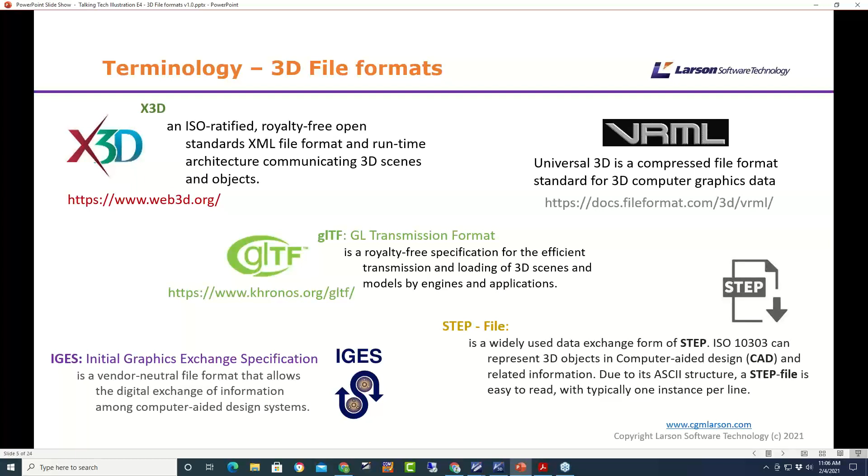As an overview, these can really be categorized at the top level as open and native formats for 3D. When I say open, I mean they're not owned and are non-proprietary—usually governed by a non-profit organization, so they're easily available, reliable, and you can standardize on them because they're open. They should be interoperable between systems. Then we have native formats that are owned and proprietary, which usually don't interchange between different CAD systems, although in some cases the software company does publish those native formats, usually at a cost, so they can be supported in data exchange software.

We usually categorize 3D files into two camps: data exchange and publishing formats. The open formats for data exchange, STEP and IGES, are very good for data exchange tasks and readily available from all major CAD systems.

So we'd probably advise that if you bring in data out of a CAD system, if it's not possible to use native, then STEP definitely would be the one we would choose. It's the richest format and very reliable and robust.

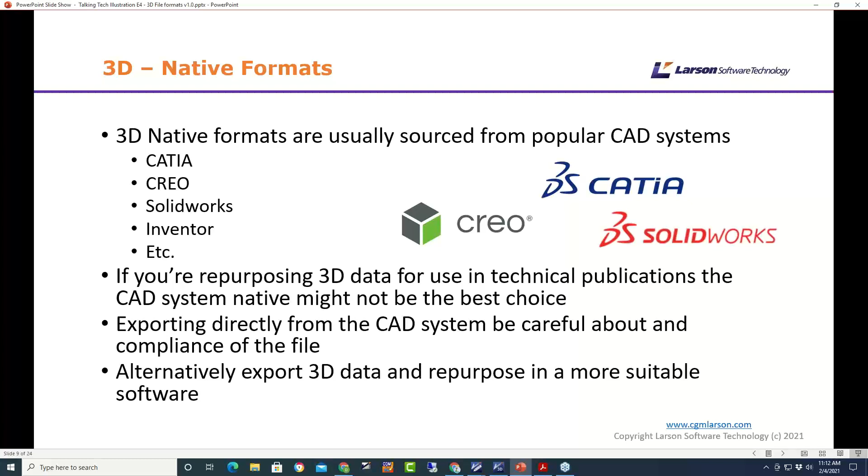So in the publishing world, if you wanted to publish these 3D files out to go into a web browser, there's a multitude of formats to choose from. There are some proprietary ones—I'm not going to mention them specifically by name—but there's certainly a lot more open formats.

So some considerations when selecting a 3D format: it's certainly important to be easy to implement in viewing the model, preferably in a web browser. The file size is also important because the bigger the file size, the longer it would take to render that on the screen.

Also in the technical publications arena, it's important that you can add metadata—interactivity and hotspots, and probably the ability to link those hotspots to external text—and the support of how you display that text. Something called placarding is where the text remains flat and doesn't rotate with the model, which could be important for legibility and instructions. If I haven't explained that very well, we'll probably have an example later in the demo.

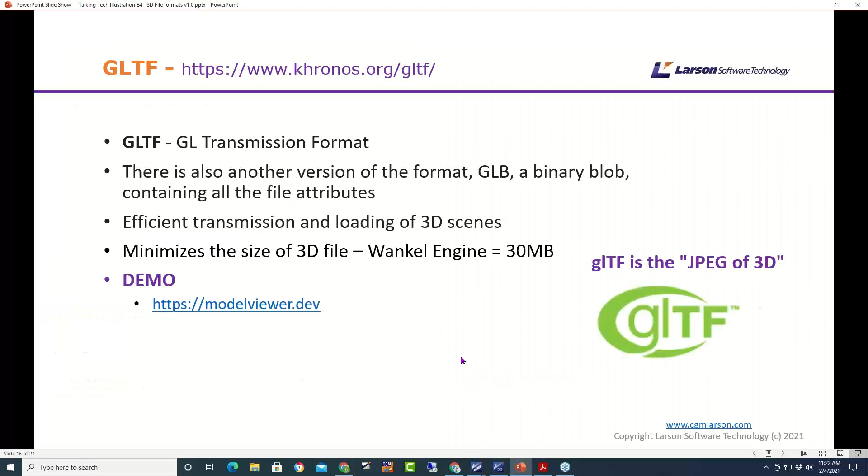And the other one I was talking about is 3D PDF. Again, it's open - obviously PDF became an open format a few years ago now. But this 3D PDF is really a standard PDF file with 3D content enabled in it. So it's governed by the 3D PDF consortium.

Inside the PDF, you would find the 3D file embedded, and it would either be a U3D or a PRC file. Probably PRC is more popular; it was developed by Adobe. The nice thing is it can be stored within the PDF, but also extracted for future use, which is quite interesting. If you need to archive a file, you can bring it back out again and reuse it in the future if needed.

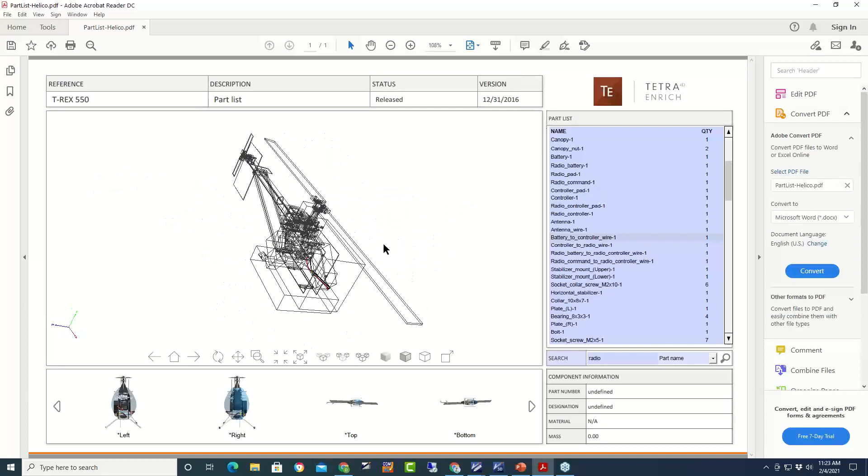So before we do the poll, I'm just going to show this example I pulled down, so we can maneuver the model in space. This is just a PDF, using Adobe Reader. The interactivity works. Just a caveat on this is that it doesn't happen just on the fly - you have to author this in some way using some software.

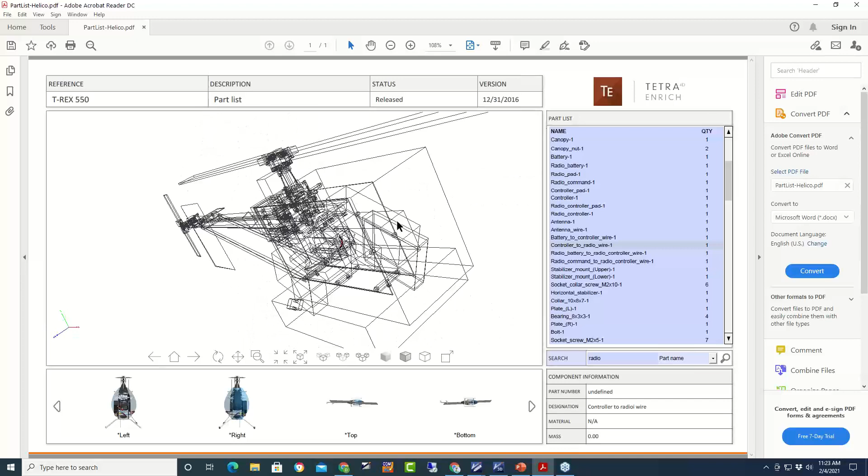So we can zoom in on the model, and it kind of goes to wireframe when you're maneuvering it, just to speed the rendering up. My only caveat about this is it's just one PDF file, so if you had a manual, you'd have to stitch all these together, and I forget the file size, but I think it's around 8 megabytes or so.

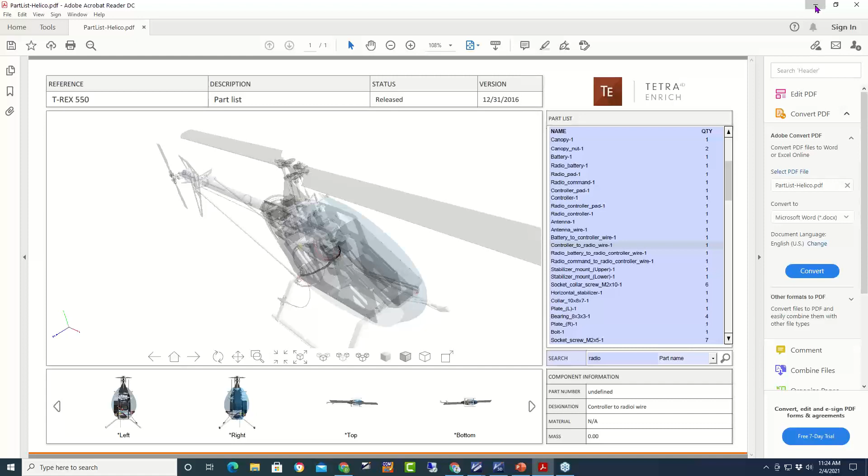Let me just double check it, and we'll come back to that. Sorry about that. Can't get to my desktop. Okay, that refuses to go to my desktop. Let's hold on.

Okay, so let's just look at the properties of that. So it's about 7.5 meg. You begin to see that if you have a multitude of these, stitching them together is going to result in a very large publication. So I can see it being used, but perhaps more for service bulletins or something like that - I think pulling a whole manual together in PDF would be a challenge with all those 3D files.

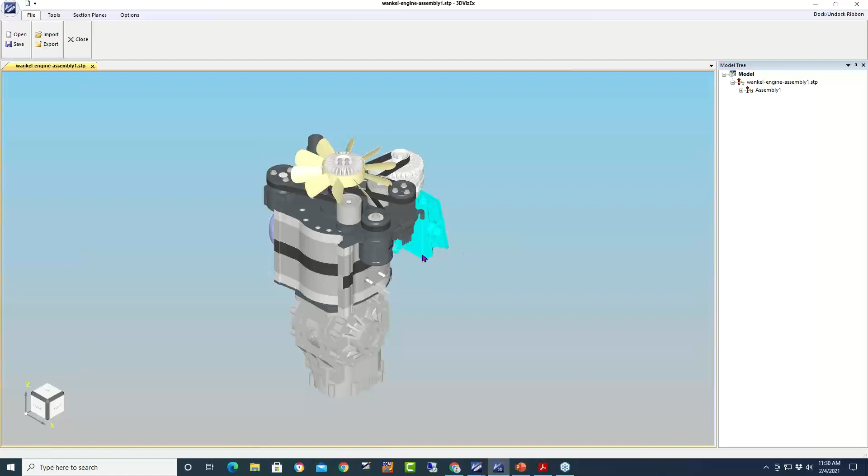But once we've got it in the software, and usually any software for that matter, once it's loaded into memory, it becomes a lot easier to handle. We can zoom in very quickly and so forth. Just be aware that we're obviously on the webinar, so you will probably have some lag on here.

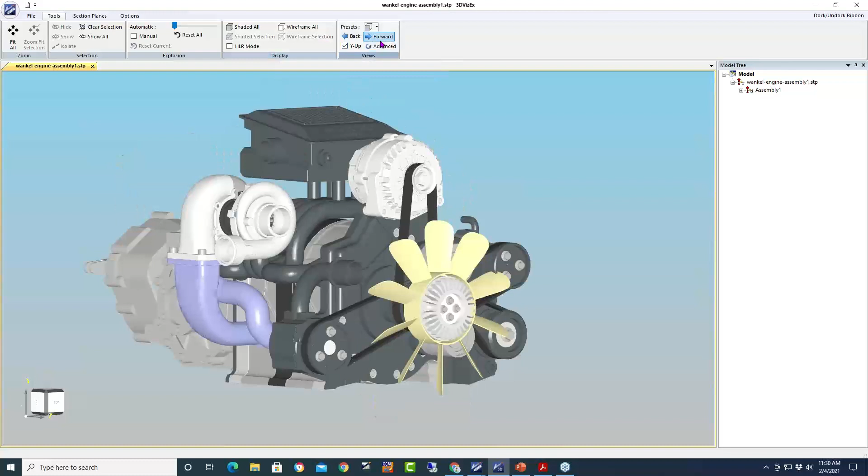So what I would usually do is actually maneuver this to, in this case, the isometric view that I'm looking for. And then I might want to begin to explode this file away, or some of the parts away on the file, to begin work on it.

So this is where our new format comes in. This is where I could save the file as a .vx3d file. And we'll just replace that one. So that will now be in that state. So it now becomes a VX3D file.

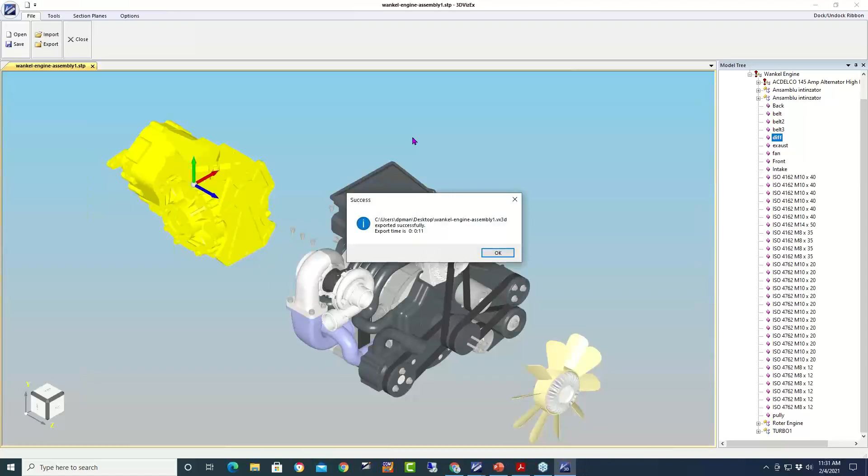Okay, it just says it did it in 11 seconds. Okay, so I've saved that to the desktop. I again can reopen that, and it's a lot quicker to open than in the original step file. But let's see if we can open it up.

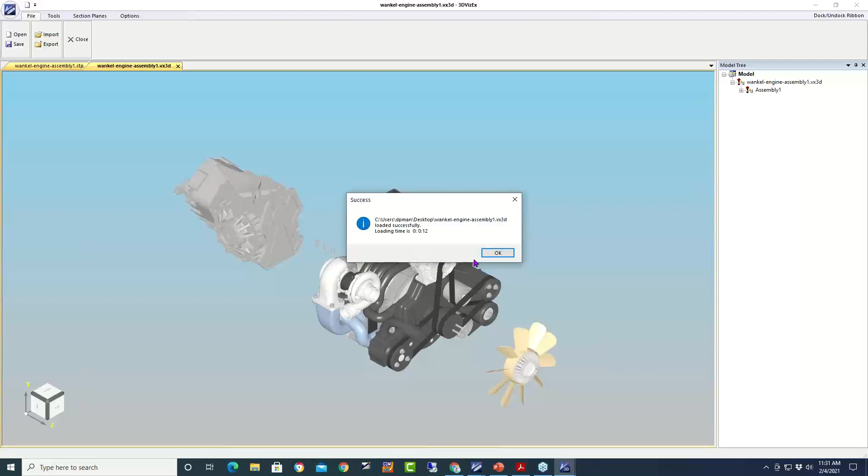So it should be on the desktop. It always seems longer when you're actually doing a demo and waiting, but I think it takes about 9 seconds or something to open it. Whereas this is obviously on my machine as well. It's actually 12 seconds. But you can see it's reopened it in that state that it was in before.

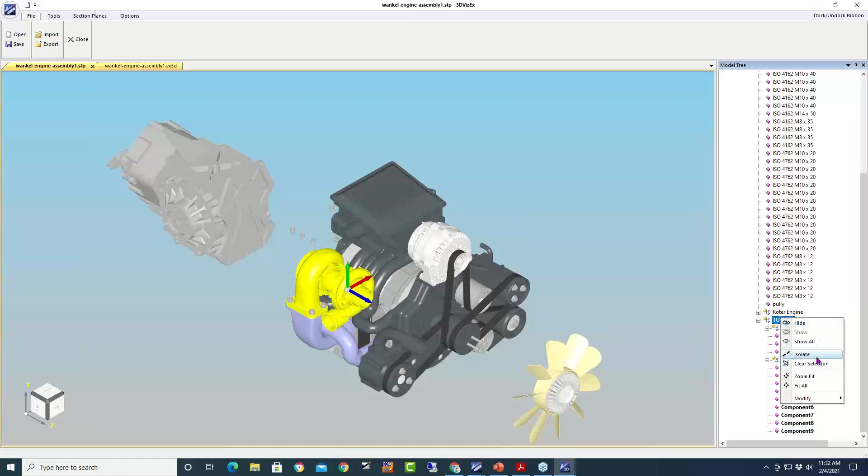Okay, so then I can still work with this file. So let's go to turbo here, and I'm going to just isolate this. And I can then work with just part of the assembly, begin to explode this off as well. So, and I could save it again in this particular state.

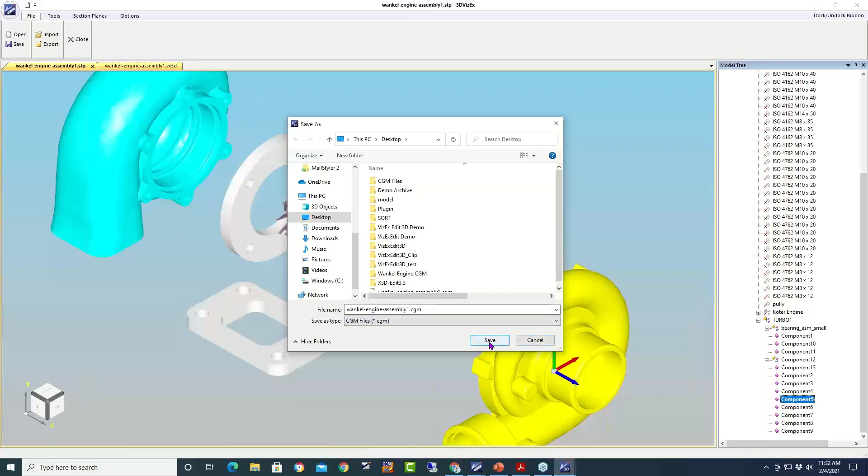And this is where we had the difficulty, is actually now, if I want to save this as a CGM, a 2D file, then a lot of the formats that we were trying to use as a native format didn't support the ability to do that. So I'm just going to save this as a CGM.

Okay, some of the settings are at the top. I don't want to dwell on that too much today. But certainly with the step file, the best quality we get converting to 2D is with that particular format, or it could be IGES for that matter. So we see a more traditional type illustration from that 3D file.

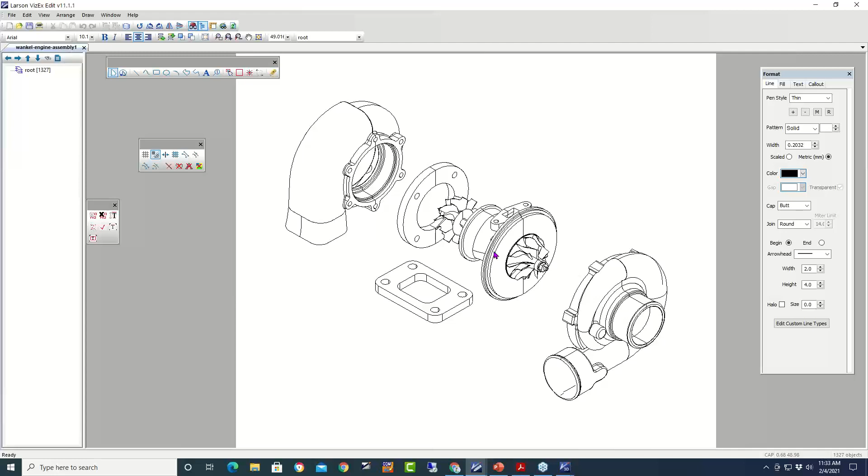Okay, let's just go back to our original.

So from here, I mentioned those other 3D formats. If we go to File again and Export, one of the options we have is going to X3D. The thing I like about X3D is there's something called X3D DOM, which means you can actually put this straight into a HTML file, so it embeds the 3D file into it. And if we just go to that option...

We've got some settings we can put up here. I'm not going to go into those in too much detail, but one of the options is to actually export the model tree itself with the 3D model. So let's just try that, and it should open it up straight away into the web browser when it's done. Again, it just takes a couple of seconds, and then it opens up in the web browser.

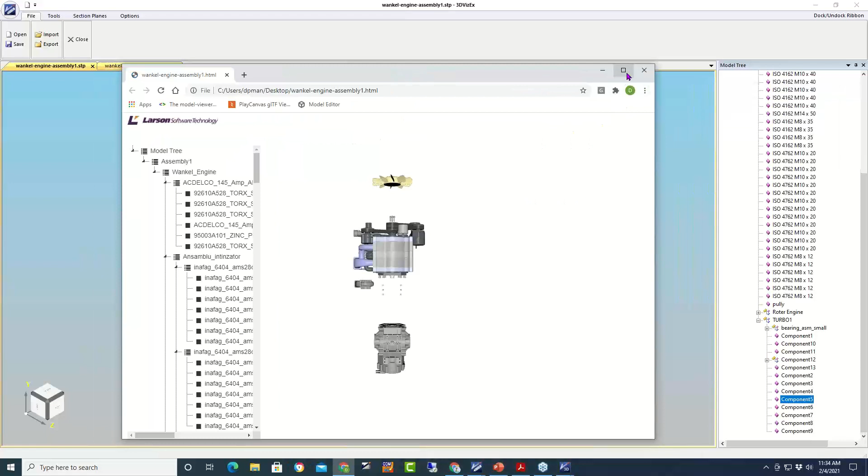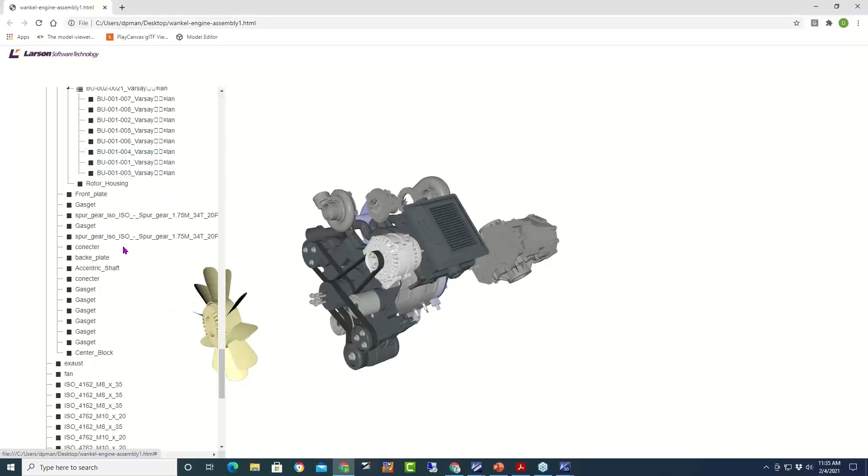Okay, so obviously we exploded the model. We can zoom in on it, and we get the model tree on this side here. Now this does interact with the model. Let me just see if I can find the spring, the fan. You can see that it highlighted the fan there.

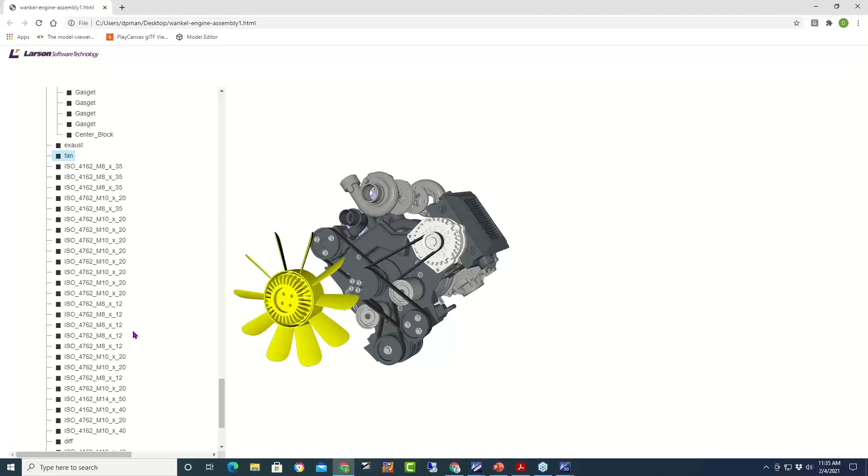So I think this could become useful for, obviously, the spare parts world where you want to identify parts and so forth. We're still perfecting this export. You can see there's a lot of extraneous data in the model tree, but in the next iteration of the software we'll be able to change names on that model tree and edit them out or in as needed, so that's going to be more interesting and more useful.

But as I said, this is the X3D format, and you can see that this is just in Chrome in the web browser. We're straight into Chrome viewing this, and the way that you can zoom in, it's pretty quick how it handles the model. So that's definitely a viable format for putting stuff on the internet, I would say, from a 3D point of view.

So let's just go back. One of the other formats we mentioned was GLTF. I'm just going to do the same model, I think. Export this out. Let's try GLTF.

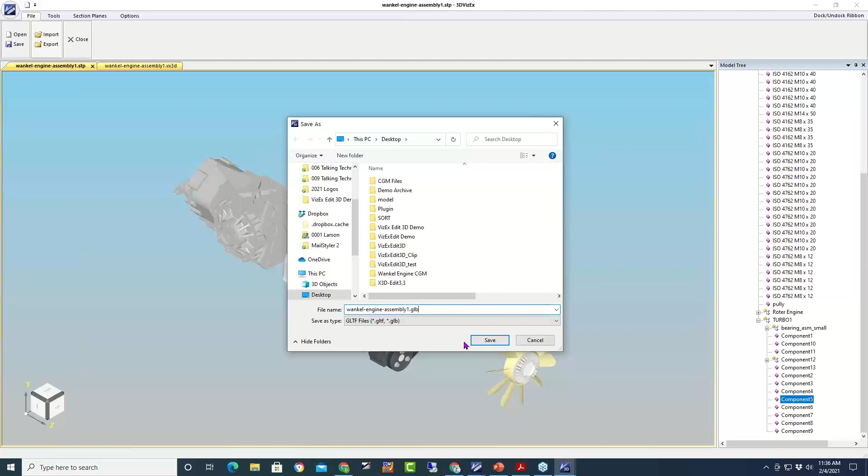In fact, we can just rename this and make it a GLB file, I think. Again, I'll put this on the desktop.

What I forgot to do here is disable it, because it'll try and open in something called the Microsoft software 3D Paint, which doesn't handle it very well. I think it's only used for small files. So a better alternative really is to use...

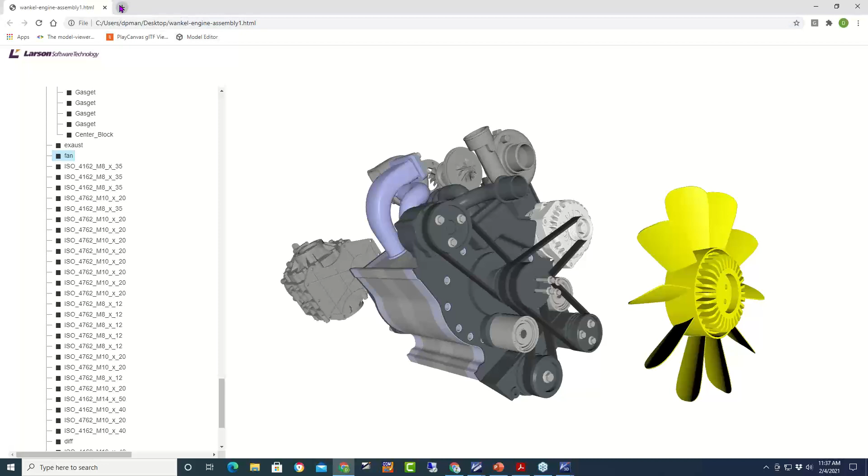Let's use the model viewer. Oh no, let's try the... so what we can do is, excuse me, I'm just checking you can still see this. So this is the file I created.

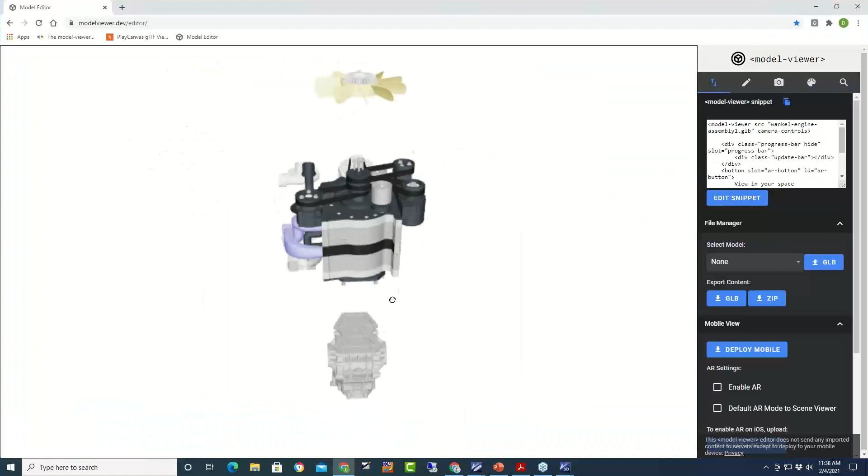I drag and drop it into, this is the model editor, which is part of this model viewer development. You can see now that I've dragged that into the box here. So this is the GLB file. This is quite a useful development tool just to see how you can handle this particular format.

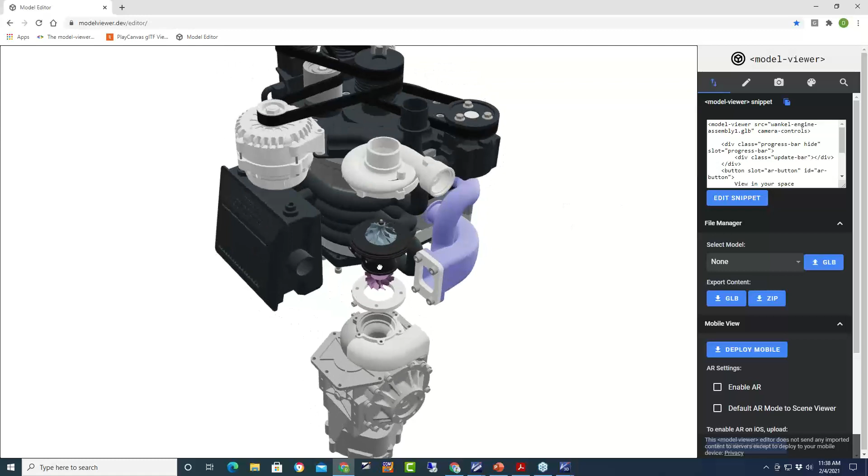And what I mentioned earlier was that it's important, I think, with publications, that we're able to add kind of metadata to this. So everything you've seen so far, you can see the HTML code snippet on the right hand side. Let me just, this is the edit button here. You can see we've got hotspots.

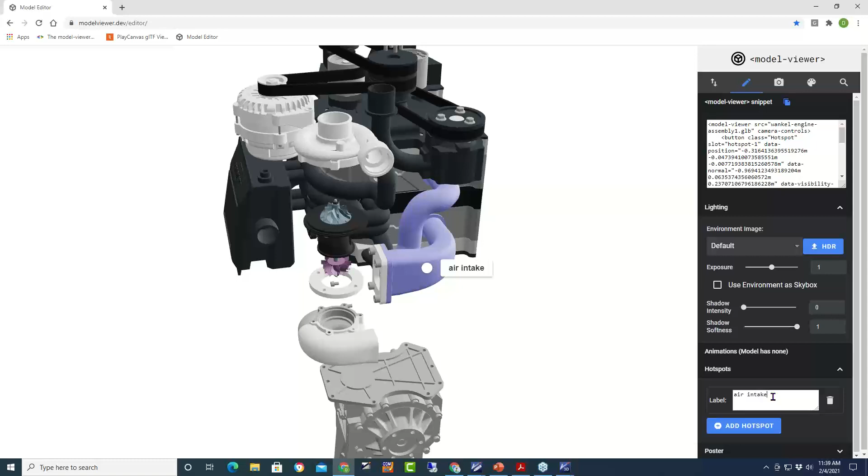So you can add a hotspot to this. You can add a label to it. And as we move around, when I mentioned placarding, can you see how the text does not change its orientation? I certainly know that is one of the requirements of S1000D, that the text remains flat and doesn't rotate with the model, so you'd be able to read it.

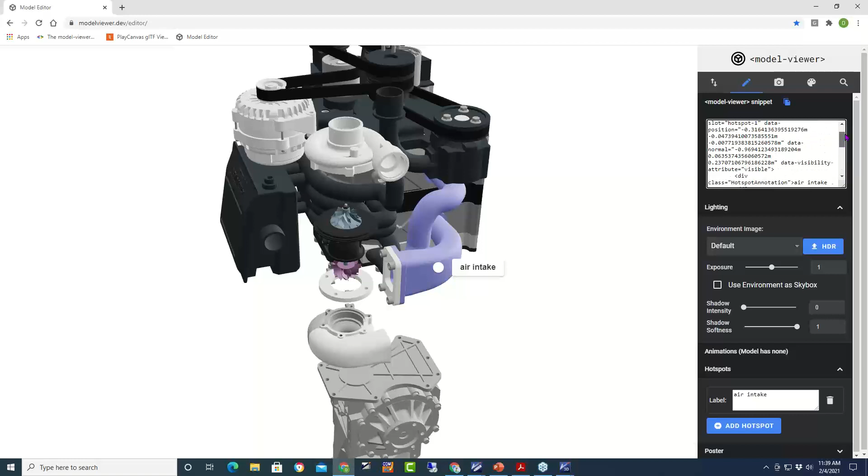So we've got quite a lot of work to do on this. We're working on some use cases for this. But all the HTML, because this is just HTML, is here to create this so far. So I think that's pretty impressive, certainly the speed and so forth, and you can change the lighting in here. There's a lot more you can do than just add the hotspot.

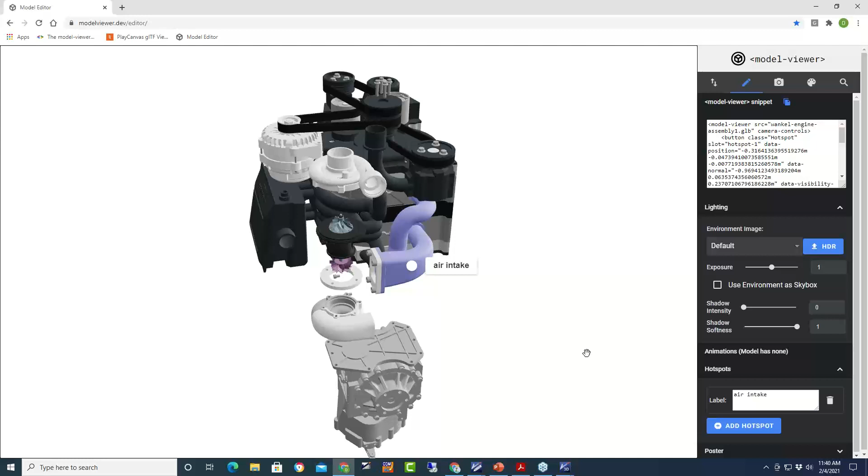And obviously we need to know how we're going to link those into perhaps the text, into a parts list, or this could also. glTF is also capable of doing animation and so forth. But this seems to be a good way of interjecting perhaps into an interactive manual, 3D data into an item without the need of a viewer. So there's no viewer here, it's just working within Chrome again. So let's just go back again.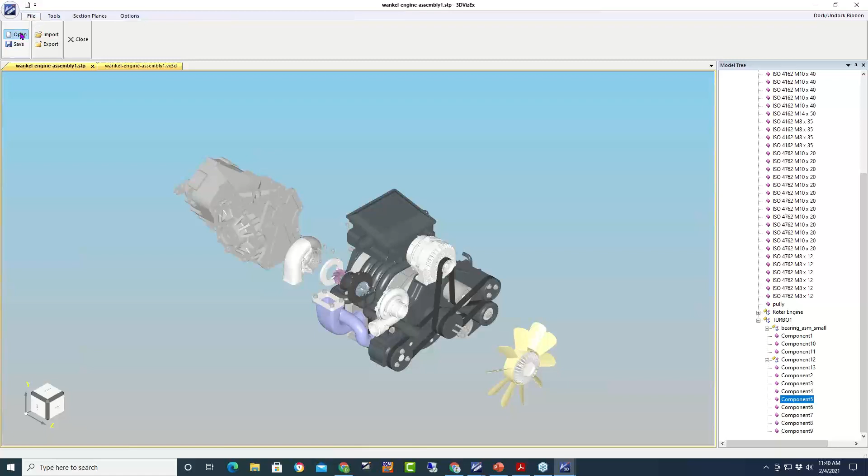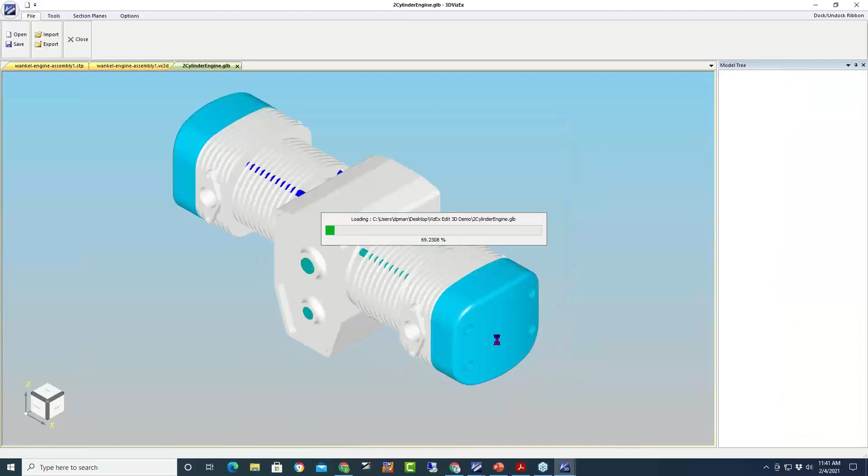So the other thing we did here was that we also made it possible to open back up the GLB file or the GLTF file as well. So let's import that instead of open it. This file was just an example I found on the internet, and it's again a GLTF file. Again, we get the 3D, and we can work with it within here. So it seems to be quite a good interchange format, really.

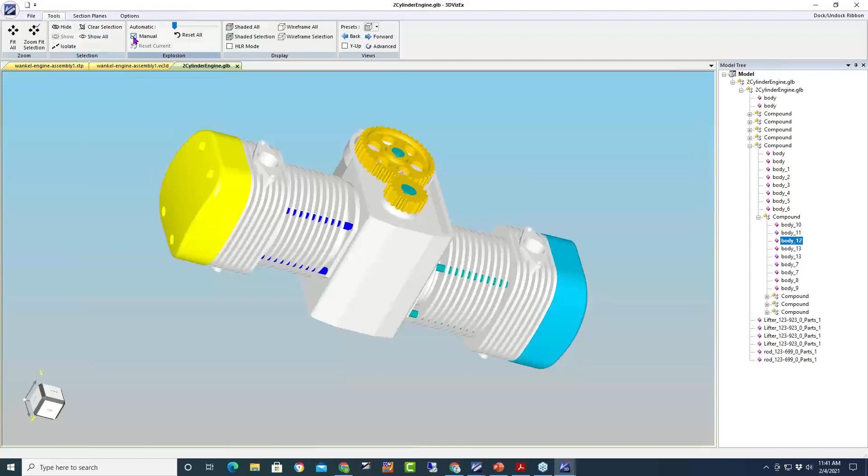GLTF, we can reopen it. We can do things with it. We can explode it using our tools here. So let's just take that out. And we get the model tree as well. So very impressed by this particular format, and it's something we're going to work with going forward.

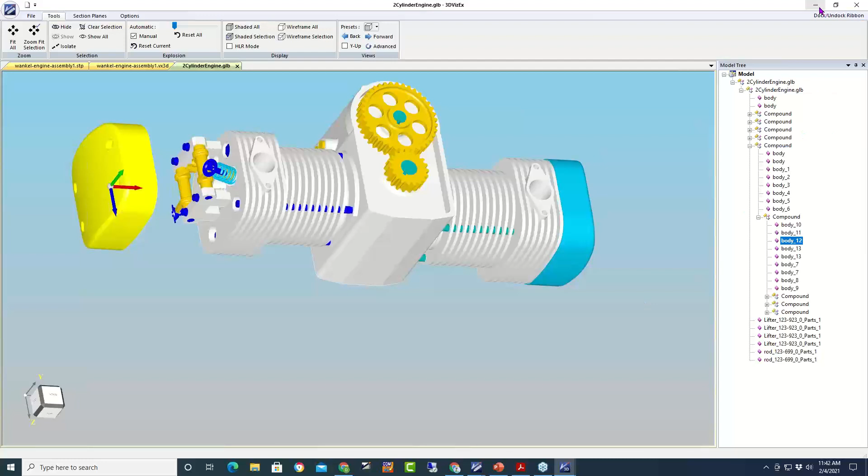Okay, so hopefully that's been useful. Obviously, it's a bit of a whistle-stop tour of publishing formats, but we certainly think there's a lot of scope here for publishing 3D data that perhaps wasn't there in the past. So obviously you might be using things already, but I think there's a lot more out there that you can take advantage of.

So just in summary of the benefits of 3D, obviously I come from a world where we really created 2D illustrations, but I think finally things are beginning to move forward, and it might be because of technology, software, all sorts of reasons like AR, augmented reality, glasses, and so lots of different kinds of things are coming together.

But the ability to view components from any viewpoint is a nice thing to be able to do. It could be a bit of a distraction, but overall it's a good thing to be able to do. Certainly, it would help in the recognition of component parts if you can actually look at them from different angles. If you're doing procedures for disassembly or assembly, you could animate those and give somebody a very good overview of a complex procedure rather than trying to write that down, step one, step two, step three. If you actually see that happening, then that's a very powerful thing to enable the maintainer to work on a particular system.

And also when we come to AR and VR, you still need 3D data to work with. So you need a format that you can use. Certainly, I know GLTF is being used in that kind of world. So now we can see it could also be used in, say, an IETM, an interactive manual. I think AR and VR are becoming more popular, but you can't really use that for everything. You can't use it in a publication, perhaps. Certainly not for everything within the publication. The cost might be too high.